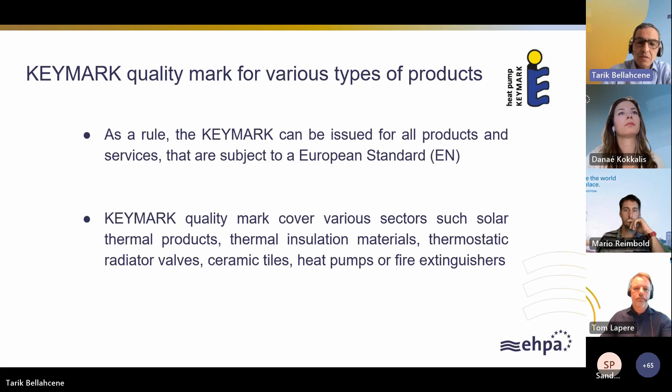And as a direct consequence, the KeyMark is covering several different products from different sectors. So the most common ones that you heard about maybe are the solar products, the solar thermal. Then you have also the insulation that is quite popular. You will see I have a slide dedicated to these programs, and you can see how important they are. You have the thermostatic radiators, for example, ceramics, and last but not least, we have the heat pumps that are also covered for now almost a decade with the KeyMark certification.

So now let's focus. We were in the KeyMark concept in general and the ownership, and now we are going to focus on the KeyMark dedicated to the specific sector of the heat pumps. So we have a KeyMark certification scheme for heat pumps, and we organized this certification with different groups. So we have the heat pump scheme group that is overlooking all the certification scheme for heat pumps. We have a steering committee that is working, let's say, in detail on the requirements, on the rules, and managing the general certification process. And we have the Secretariat, which I am part of, coordinating the work of the scheme group and the steering committee.

But we are not alone doing this. Of course, the scheme group and steering committee are involving all the stakeholders. It means that we are involving the manufacturers, the testing laboratories, the certification bodies, and of course the European Heat Pump Association, bringing also input, as Danae explained. We have the policy part, the projects. So they are also feeding this Heat Pump KEYMARK scheme.

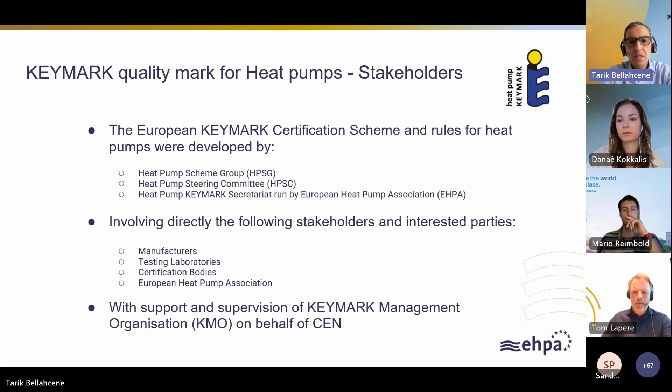Coming back to the KeyMark Secretariat, where I'm sitting, to give you a brief idea of what we're doing. So we are coordinating, as I said, the working groups, but not only. Our main task is really to work on the recognition, because that's the main idea of CEN creating the KeyMark, to harmonize the certification market. That's the main goal, to facilitate the manufacturers to be on the same level of quality, to facilitate the entry to the markets, and also, and this is very important, it will ease the consumer to understand when they buy a product or an equipment in this situation.

Our second objective as a KeyMark Secretariat is also to make the brand known and recognized. So this is also very important from the consumer side, or the regulator, or even the installer, or someone who is controlling an installation. Looking at this mark, they will feel confident that this product is monitored and is of a certain level of quality.

And finally, the third point is an improved database. So we give access, I will explain it later, to the information related to the performance of a heat pump. So for the consumer, regulator, again, installer in general, they know what's the performance of a heat pump that is certified. So we are trying to ease and to facilitate access to this information through the database that we have.

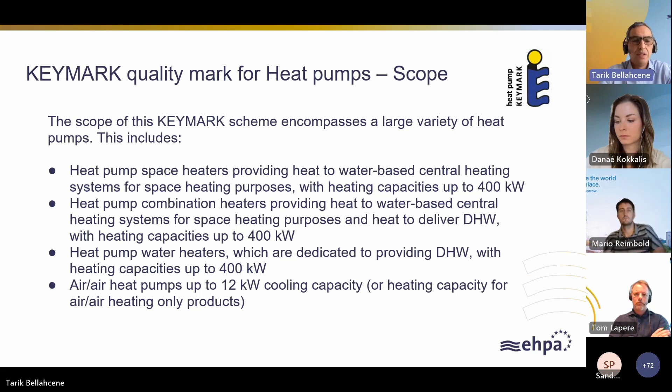Now I will move to the scope and the products specification classification. I will briefly go through this. If you need more information, you can go to our rules that are available online, and you can also ask your certification body if you have more questions. So briefly, any heat pump that is used for heating purpose or for domestic hot water production can be covered by this standard. And any types that are coming through innovation can always be included in the scope of the certification. So if you have any type that is not covered by the scope of the certification, you can always address the Secretariat or directly the steering committee and propose to have your product, your design included in the certification process.

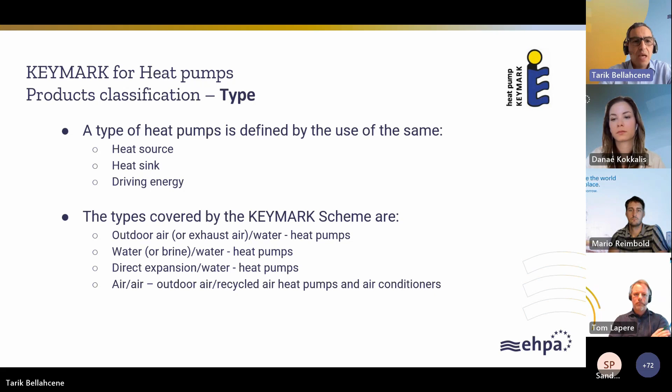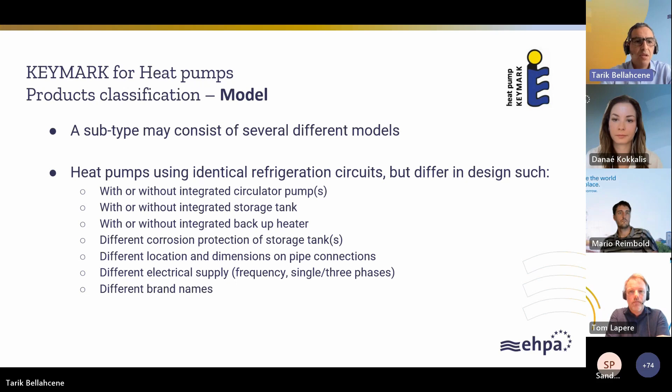Also, very briefly, the classification: you need to know that we have defined what we call a type. We have also a subtype and a model. So we have three parameters that are defining your heat pump, but the type, subtype, and model can be discussed with your certification body and the laboratory, and they can really take your range of products to be certified, and they can discuss how they will classify and put them in families according to the type, subtype, and model. So do not hesitate to contact your certification body and your laboratory.

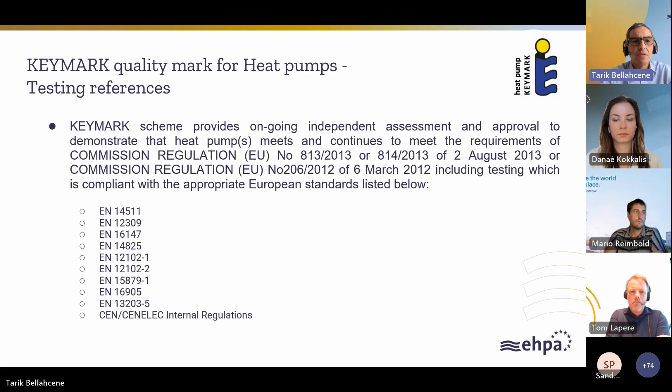In terms of standards and references, as I said, a Keymark can exist only if European standards are available. And Mario will go through these standards when explaining the type of testing. So you have here the list of all the EN standards that are used and referred to make the testing and to check the conformity and to confirm the performance. But you don't have only European standards, you have also some Commission regulations that are linked to ecodesign and energy labeling. So what you need to know is that when the Keymark was thought and developed, the idea was to align with the ecodesign requirements, to make sure that the industry is aligning with the requirements of ecodesign. So there is ecodesign and then the European standards specifically defining how to test, what to test, in which conditions.

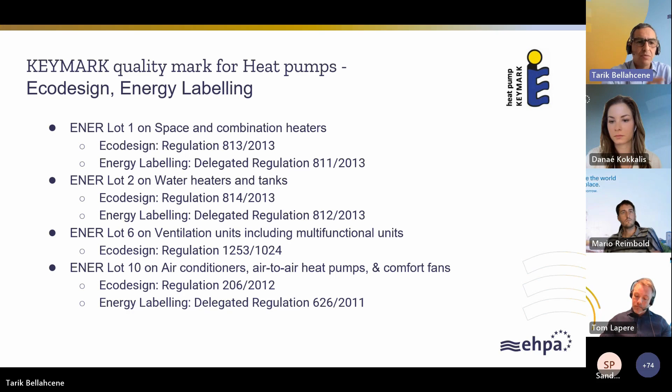Now we move to the certification process. So I explained that the Keymark is a third-party certification process. It means that the laboratory and the certification body are completely independent from the manufacturer or the industry that is asking for certification. This is what third-party certification means, as opposed to second party or self-declaration. So to guarantee this third-party certification, the certification body needs to be ISO 17065, and the laboratory needs to be ISO 17025. And in the scope of this ISO 17025, they need to have all the standards that I showed two slides earlier.

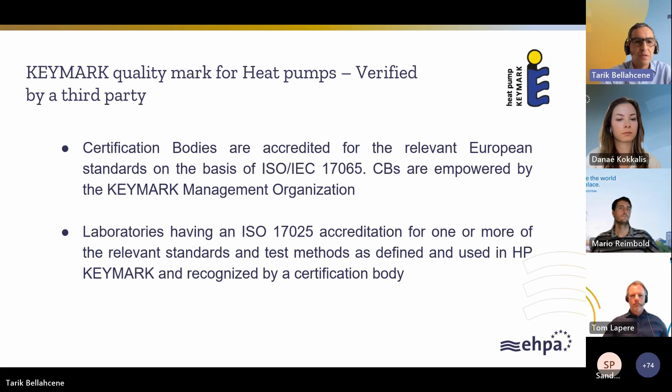In terms of certification decision, we have 10 certification bodies today that are capable and formally recognized to deliver certification for the Keymark for heat pumps. And we have 30 laboratories capable to do the testing and provide the test reports to the certification body who will take the certification decision. The good thing for these 30 laboratories is that geographically we have a nice distribution, so it facilitates the choice for any manufacturer who wants to test and certify their product.

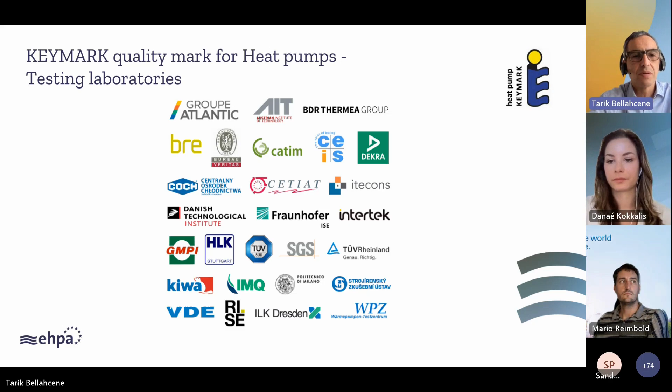Now the certification process itself, because I'm talking about certification process, but it's only now that you see the picture. It's a classical certification process, so you have to apply as a manufacturer, or a distributor can also apply, by approaching one of the 10 certification bodies that I showed in the slide. Then there will be a discussion about your products. They will start to define the family of products, what needs to be tested, how they will be tested, through which period of time you need to have this testing done, and so on.

And after discussing and defining your products to be certified, the certification body will then invite you to approach the inspection part. So we will have to do an audit of the production location, and at the same time we will start to look at the sampling. So we will start to select some equipment for the testing. This equipment will be sent, and then you will move to step number 3 for testing.

When the testing is completed, the test report and the audit report will be sent to the certification body that you choose, and the certification body will finalize the certification process by reviewing the audit report and the test report, and they will make their certification decision and will deliver the certification.

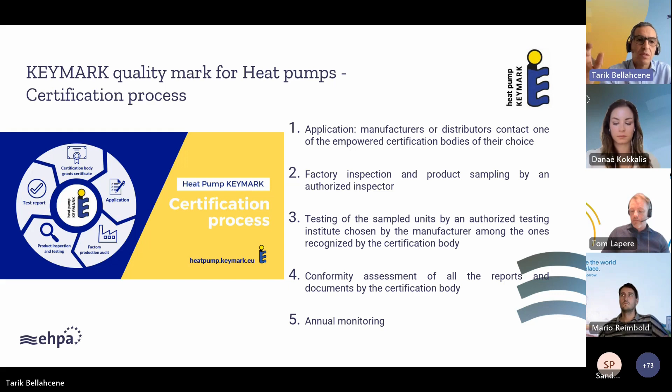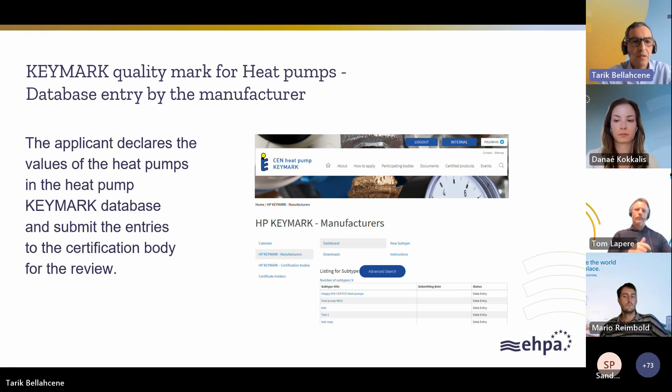It is also sometimes a question that comes up, so I added this slide prepared by DIN CERTCO. Thanks to them for that. When I said that you will contact the certification body and do the audit, part of your work in this process as a manufacturer is that you will enter the values of the heat pump in the database, and the certification body will review these values that will be used for the calculation and combined with the testing. So it is important to know that you will have access to a relatively clear database to enter your values. But if you have questions, you can always ask the certification body. Your data entered in the database will be reviewed and approved by the certification body.

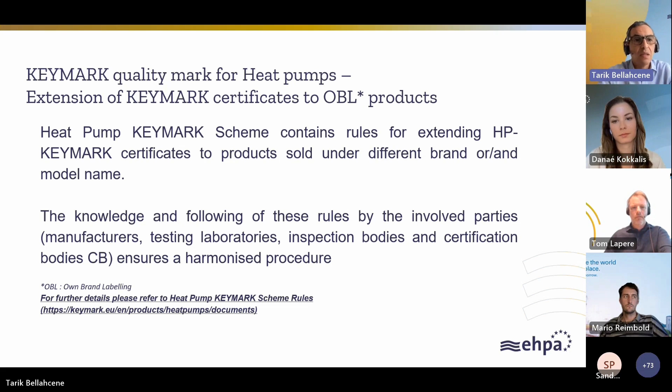This is another question that comes up sometimes. As a manufacturer, as the main certificate holder, you will have the certificate, but you will have the opportunity to have this certificate with a different name, or to have a distributor. You can have an extension of your certificate, and this is what they call the OBL. This has to be done with the certificate holder, of course, and the certification body. So you will be kind of three in the same document, agreeing on what will be the additional name, who will have this extension of the certificate. So this is definitely possible.

This last presentation is about recognition, and the first slide I will show you is to share with you these numbers that speak for themselves, where you see the growth of the number of certificate holders. This is the comparison of June 2022 with June 2023 numbers, and you can see that the number of certificate holders increased by 41%. We have today 106 certificate holders, so 106 companies are certified and using the Keymark to demonstrate quality and performance.

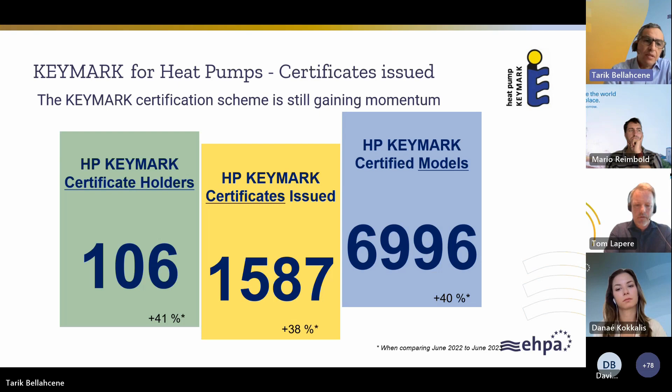These 106 certificate holders propose to the market 1,587 certificates, again an increase in 1 year of 38% in the number of certificates. And these certificates cover almost 7,000 certified models, a 40% increase in 1 year of the number of models covered by Heat Pump KEYMARK certificates. If we focus on recognition, this clearly demonstrates that the Keymark is matching the main objective of recognition and harmonization, being the unique and solid way of demonstrating quality, and to be referred to in different subsidies or in any market when there is a need to demonstrate quality or performance of heat pump equipment.

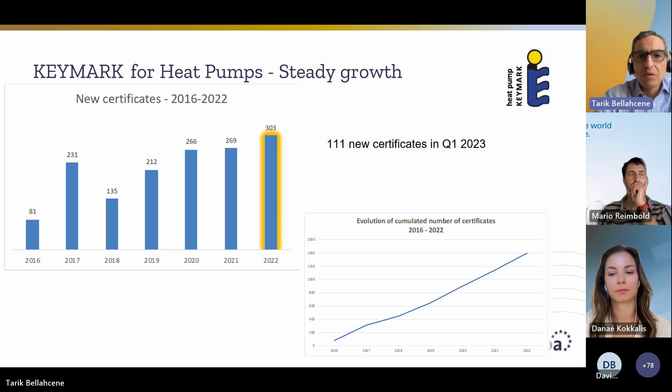I showed you a comparison year to year, and I can show you how these certificates evolved from the first certificate issued to Daikin back in 2016, as Tom was explaining. As I said earlier when we opened this webinar, in 2022 we have a new record in terms of annual new certificates. We have exceeded 300. And just to give you an idea of the trend, in Q1 of this year we have already recorded more than 100 new certificates. So the trend is still growing importantly, and this is very important to demonstrate the recognition of the scheme in Europe.

Formally, we have 10 countries in Europe that are recognizing formally the KEYMARK and referring to the KEYMARK. We had recently, early this year, the Netherlands joining the group of the KEYMARK users, let's say. And for the Netherlands, we are finalizing the recognition to include also the domestic hot water. So the discussions are ongoing.

We have also opened new discussions with other countries in the Nordics and in Europe to have the scheme also recognized and adopted formally, and to have it as a reference, because it is adopted, it is used almost in any country in the Eurozone or even beyond. But what is interesting, and I fully hear what Tom was referring to, is to have this KEYMARK scheme referenced in the subsidies or any initiatives related to supporting the installation of a heat pump.

So our work is really to expose as much as we can the KEYMARK scheme. So work in progress. The recognition is there, but we need to develop further, and we need to have the KEYMARK also recognized when there is, let's say, a scheme or a requirement already in place at a country level. I think a good example to illustrate what I'm trying to explain is the EHPA quality label. The quality label is referred to in specific countries like Austria and Switzerland. So we are building a very strong link between the quality label and the KEYMARK to not confuse the market.

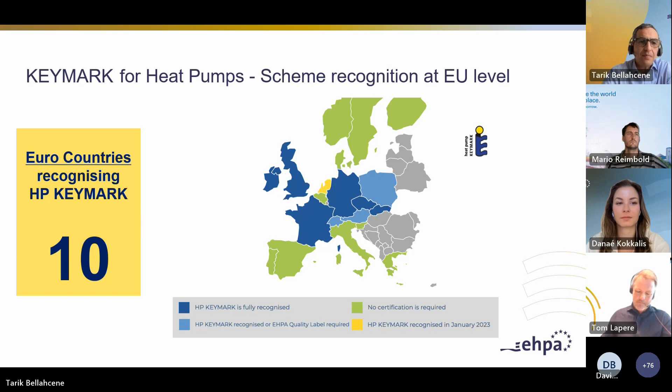So I wanted to show you also the KEYMARK in terms of recognition and where the heat pump sector is in the middle of all these KEYMARK certificates with the thermal insulation or the solar. You can see that we are now, as a heat pump KEYMARK sector, representing 32% of all the certificates that are issued for the KEYMARK schemes.

So this is also first a proof that the heat pump KEYMARK sector is very attentive to the quality, to demonstrate performance, to align with the requirements that are dictated and elaborated by ecodesign, and then the European standards that are also developed. So this is very important to see that we are really in a good position, in a good seat in terms of recognition as a KEYMARK heat pump. It is important to see that we are positioned in this ranking, let's say.

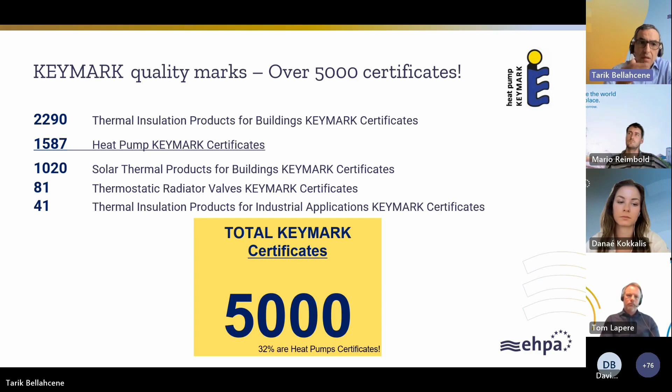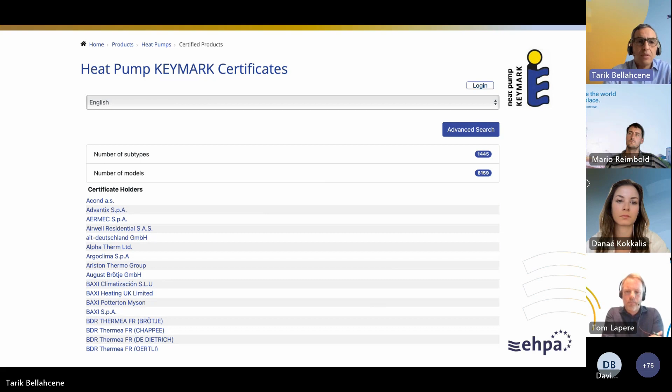We talked about the KEYMARK recognition. What is key as well is the development and the visibility and the access to the data for the consumer, for the regulator, for an installer. So for your information, we have a dedicated website. You will have free access, anyone who wants to look at a certificate, to look at a reference. We can do a search, we can download the certificate, we can ask questions to the Secretariat or to the certification body about a specific model or a subtype or any testing or performance that was done.

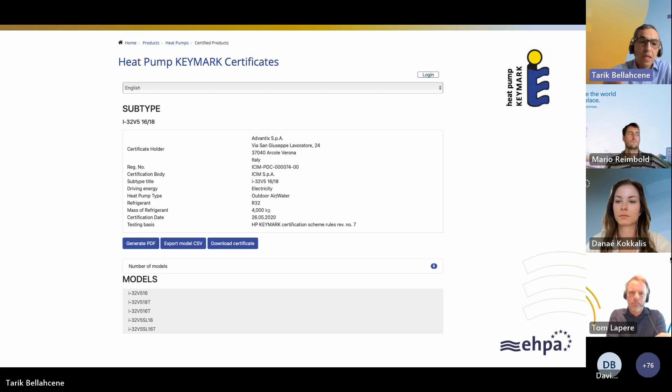So we have this important transparency that makes the recognition even stronger. The fact that we can have one centralized database where you can find all the information about the products. And I can tell you that this database is work in progress, because we are always trying to improve the database with the communication team at the EHPA. We are trying to have different languages, to translate, to add additional information, to link this database eventually with another database. So that's continuously what we're trying to do. These are some screenshots of the database.

I will finish just to remind the simple benefits. Straightforward third-party certification supports purchasing decisions. This is obvious, and most of all, we look at the purchasing decision. We want to speed up the purchasing decision for some parts of the stakeholders, but also what is important is that we give confidence to the consumer that they are buying a product that is of quality and that is also energy consumption responsible, and this is very important.

The quality mark can be used again. This is really the key to enter the main European markets. We are still working to open even others and to build other bridges with subsidies or any quality requirements that may arise or that may be in place. This is definitely something we're doing.

And important, the third point, and it takes us back to our mission as a Secretariat, is to have the transparency of the scheme. So the certificate holders and the certified products are publicly visible and accessible. So this is also part of the base of having a strong recognition in Europe, which is the case today.